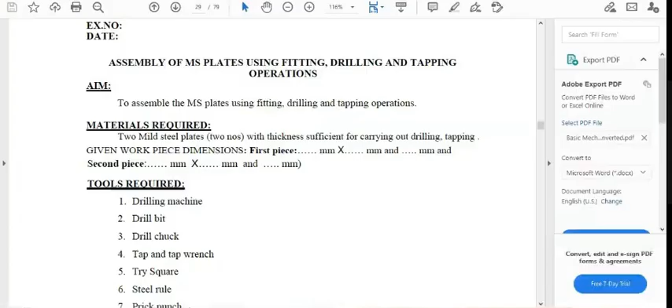Okay, so again the same thing. What are the materials required for it? Material is nothing but again you have to consider the mild steel. Dimension is whatever it may be, considering a square plate size or a rectangular plate size. I will give you the dimensions for drawing the thing in your record.

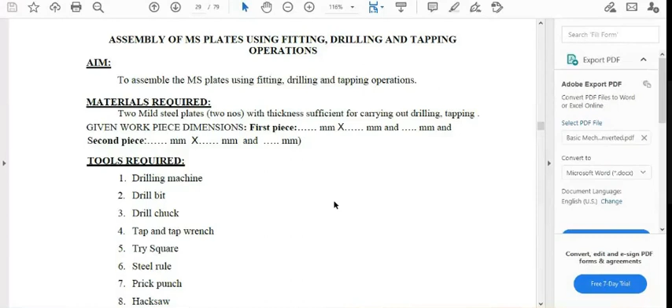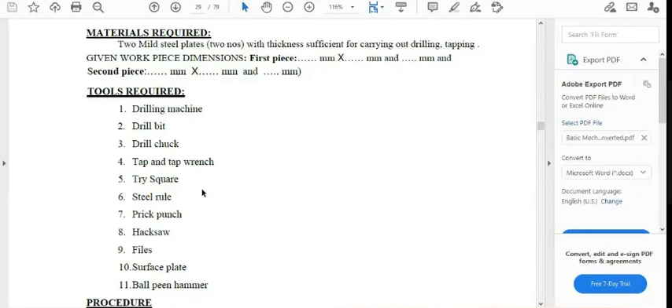And what are the tools? Since we are going to prepare a hole, definitely we need a drilling machine. For preparing a drill, we need a drill bit. Drill chuck is nothing but the holder, and a try square, steel rule, prick punch, hacksaw, files—all those things we already used in previous cases.

So just we will see how to prepare a hole and tapping in an MS plate. Just you can look at this video.

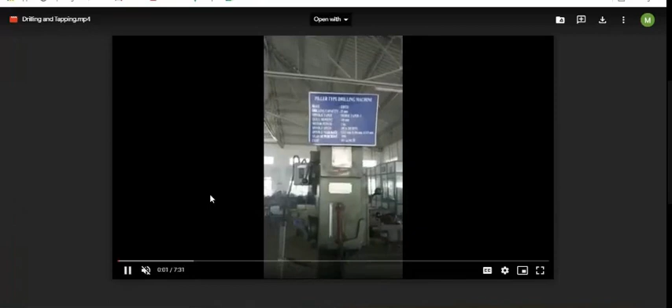Is the screen visible? Yes, sir. Okay, see, so this is the drilling machine.

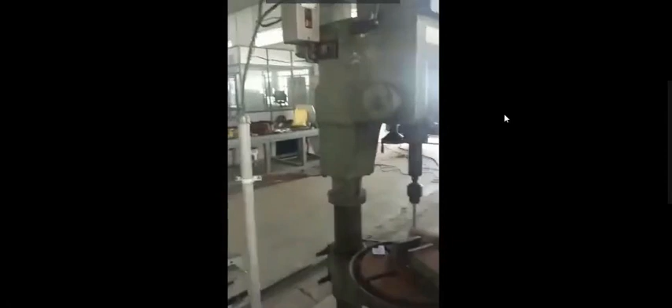This part we can say is a drill chuck. Drill chuck is nothing but where you hold the drill bit. So this is the drill bit. Is it clear? Just recognize where I am pointing the arrow. This is a drill bit. This is a drill chuck, where you can hold the drill bit.

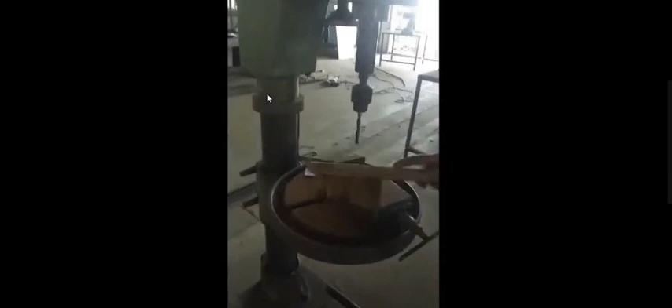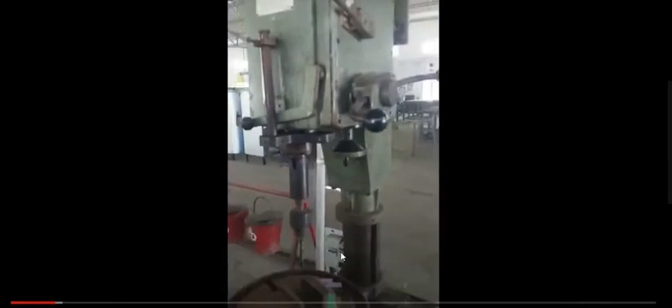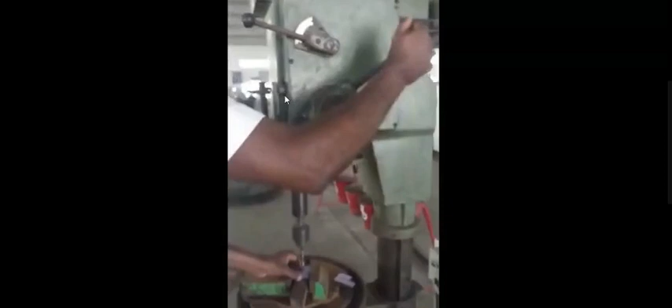This is a material holder where you can place the MS plate. This is a handle, you can apply force on it. After preparing a square plate, you can place it here for preparing a hole.

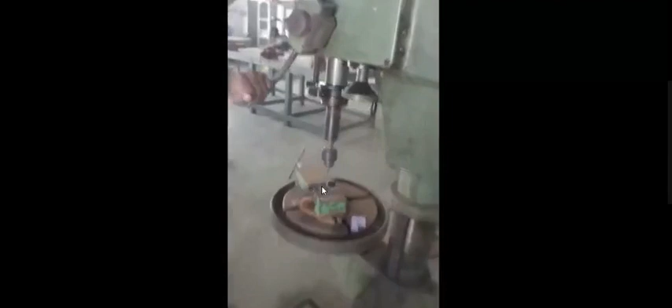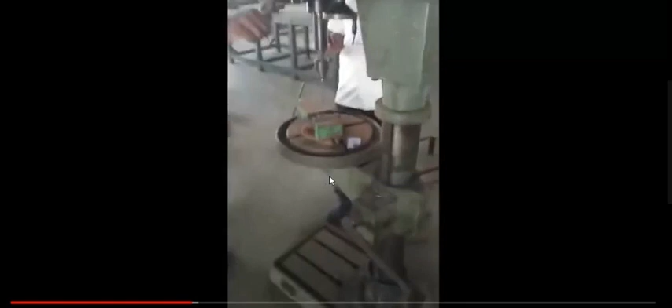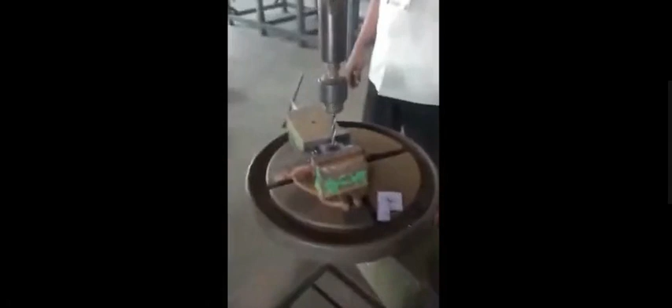So you can see, by adjusting this handle, we can force the drill bit to prepare how much amount of hole we need. See, the hole is prepared here. The size of the hole depends upon our application. You can select the size of the drill bit. We have a number of drill bit sizes, so depending upon our required hole size, we can select the drill bit.

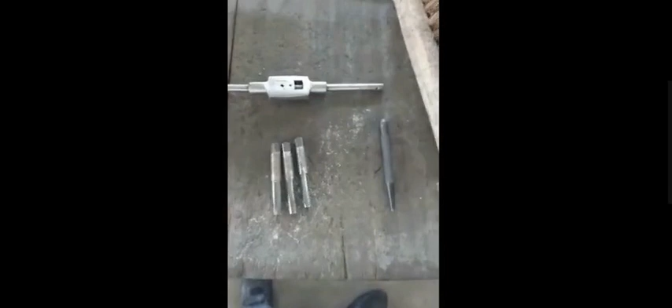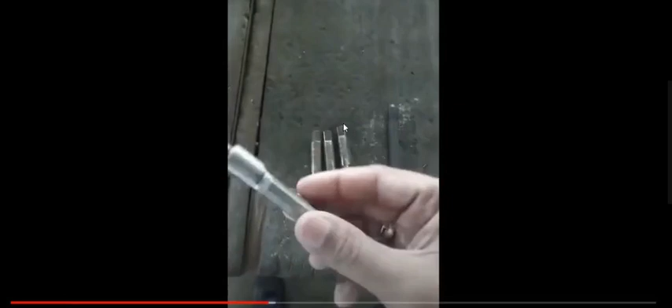After preparing a hole, you go for a tapping. So this is a tapping operation. See.

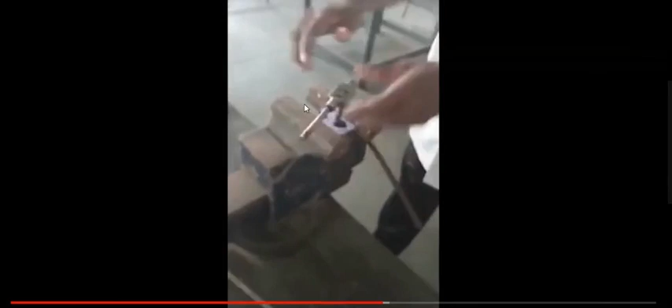See, just you can fix the MS plate in a bench vice. Already we prepared a hole by using the drilling machine. Suppose we want to enlarge the size of the hole, we can go for a tapping. So this is the tapping operation. Depending upon the necessity to increase the size of the hole, you can choose the tap bit also.

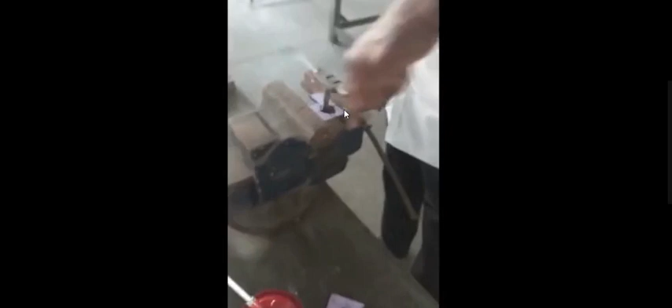So, to avoid the friction between the tap bit and the MS plate, if needed, you can go for lubrication. For that purpose, you are feeding oil, just to avoid the friction.

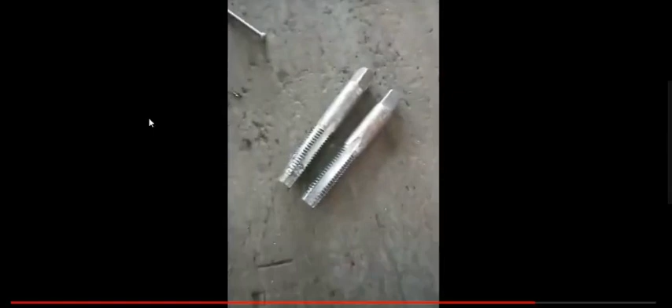Right. Again we want to enlarge the size, means again go for another tap bit, okay.

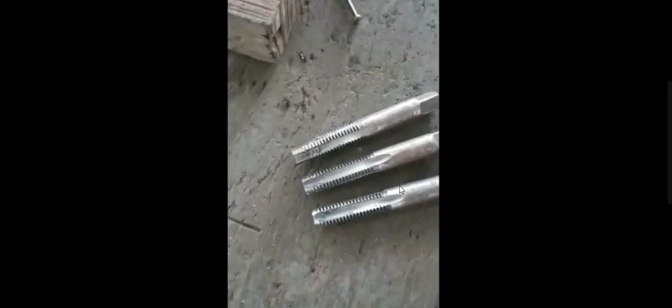Suppose we want to enlarge the size of M10, we can't directly move on to M10. So step by step you go for enlarging the size. Initially M6, then M8, like that. Step by step you enlarge the size, so finally you can obtain whatever required size of the hole, and you can fit it using bolt and nut, right?

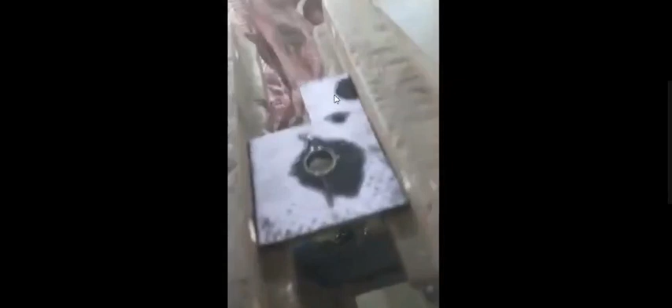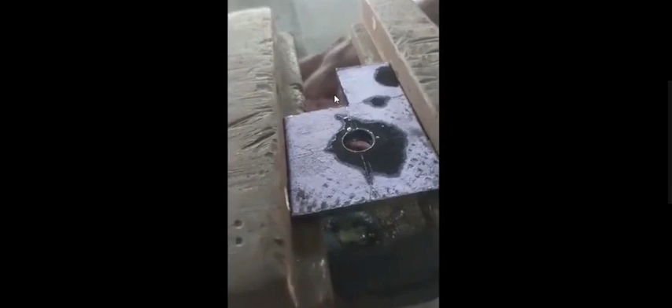I hope all of you are clear on the difference between drilling and tapping, and how to prepare those operations, right? Any doubt? Now, if you have any doubt, you can ask me. Understood?

Guys, no doubts. No doubt, sir. What about others?

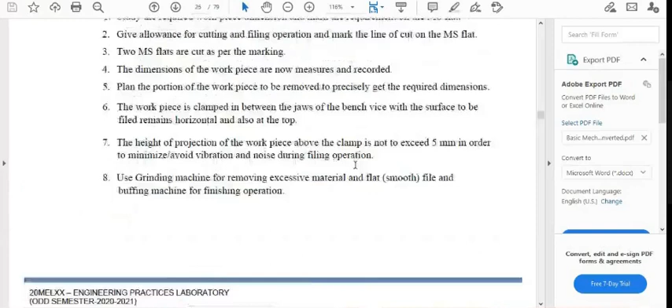See, let me tell you how to write a record. This is the first experiment: work piece preparation for fitting operation. All should follow the same procedure. You should put experiment number 1 and today's date. Same date, right, there's no change in that. All of you can follow the same date, 21/4/2021, for experiment 1 and experiment 2.

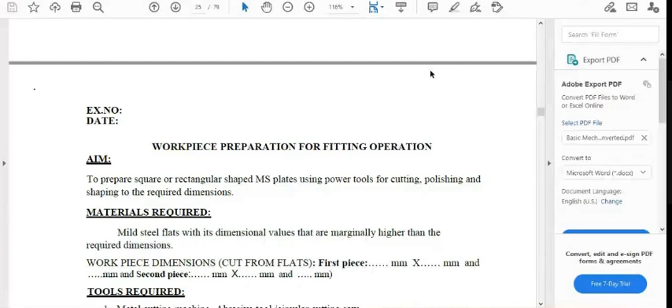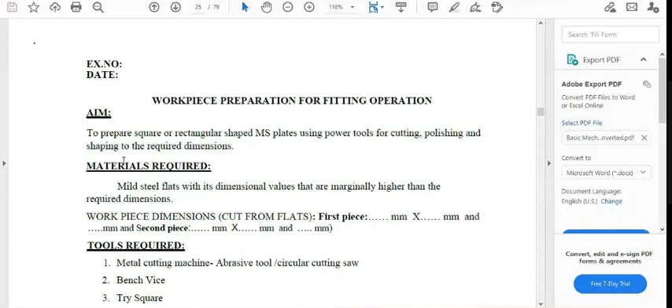Okay. And you can give a title, and write the aim, and what materials are required for it, whatever is given in our manual, you just copy the same. Okay. And for the dimensions, for example, all of you can take your roll number as a dimension.

For example, 150 is 150. Sir, you should consider the dimension for this experiment as 150. Not only for these experiments, but for all the experiments you are going to conduct in our mechanical part, you should follow the dimension as your roll number. Okay.

Yes sir, right. So how can you give a dimension for the first piece and second piece? For example, if you're considering a square plate, anybody? Based on our roll number, you can say the first piece dimension and second piece dimension.

So actually three parameters are given: the first one is length, breadth, and thickness. The thickness is common to all, please make a note of it. The thickness you can consider as 4 mm, right?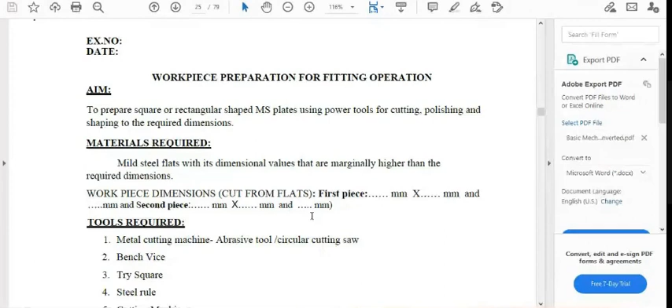Now, is it all clear? Length, breadth, thickness. The thickness is common for both first piece and second piece. Please all of you make a note, which is 4 mm.

Please, roll number 180. Sir, can you tell me your dimension for first piece and second piece? Sir, 180 mm into 180 mm and 4 mm for the first piece. Okay. What about the second piece? So the second piece is also the same, 180 mm into 180 mm and 4 mm.

Okay, good. So likewise, all should consider the dimension as your roll number. Only the thickness is common to all, which is 4 mm. Any doubt in this dimensions column? Any doubt?

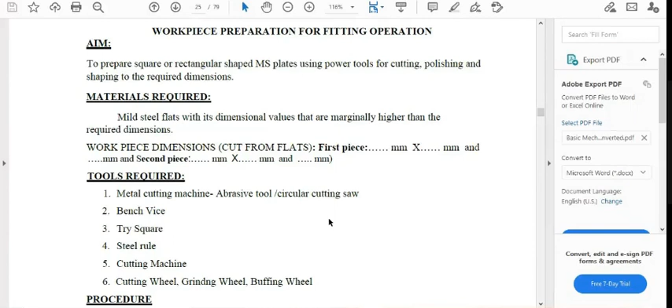Okay. And again, you should copy the same - what are the tools required for this experiment. And in the procedure, here around 13 to 14 points are given.

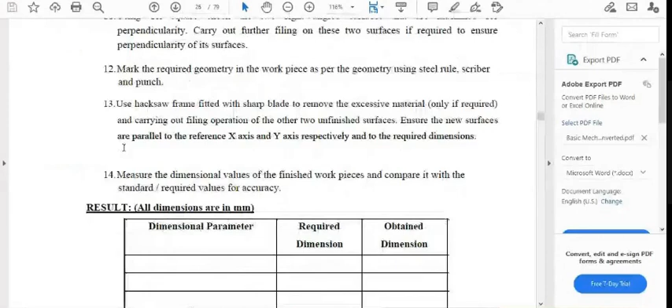Please don't copy this procedure from our manual - write it in your own words. Just give 4 to 5 points, which is enough. What are the steps needed to follow for preparing this workpiece? I expect only 4 to 5 points. Don't copy the same from the manual, I expect it all from your own, right? Okay, 4 to 5 points is enough.

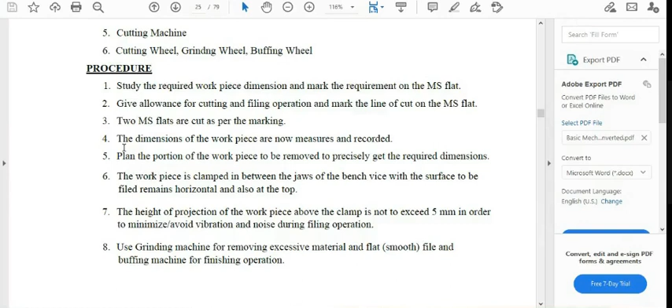What are the steps required to make a square plate? Okay, so please don't copy the procedure. If anyone copies it, I will simply mark it as zero.

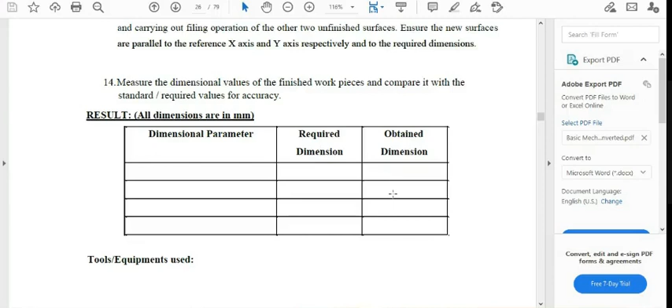And in the result column, again you can follow the same table. So in dimensional parameter, consider length, breadth, and thickness. Just enroll the required dimension. What is the length dimension? That means your roll number. Breadth is the same, and thickness is considered as 4 mm. This is the required dimension, and in the obtained dimension, write the same thing you enrolled in the required dimension.

Okay, let's come to the part of the diagram. Just plot the square plate, no need to go for a rectangular plate. All of you please plot the diagram for square dimensions. And for conclusion, give in a single line what is the conclusion for this experiment, which is also your own writing. The sample diagram for this is given in the last page of your manual.

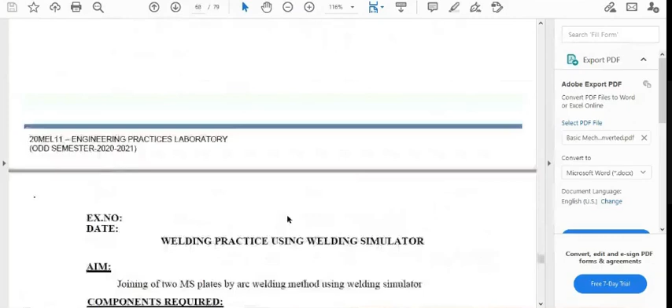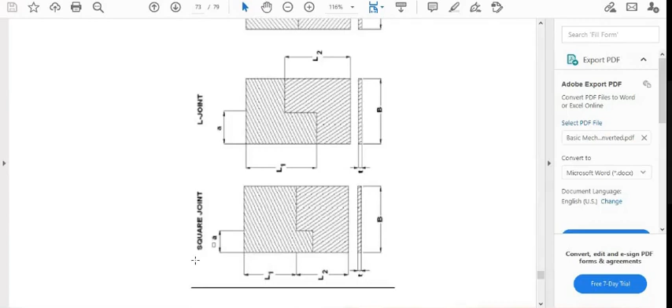Please move to the page number after this one. The various models are given: V joint, L joint, and square joint. I asked all of you to follow only the square joint. So please draw this diagram based on this one, but you should mention the dimension in the diagram, whatever dimension I gave you, as your roll number.

Okay, and you can use the scale ratio. What is scale ratio? I hope all of you use the scale ratio while plotting a graph, in maths, or in engineering drawing. I hope all of you are well known about the scale ratio. You should follow the scale ratio, so please write the scale ratio also: 1 centimeter equal to how much mm you are considering.

For example, if any roll number has 200, definitely they are not able to plot a 200 mm length. Just consider the scale ratio 1 centimeter equal to 10 mm, so you can simply plot 20 centimeters like that. Please follow the scale ratio, and while plotting the diagram you should follow the rules followed in engineering drawing. So based on the engineering drawing, please sketch your diagram.

Any doubt? How to write a record or how to plot the diagram? So this is length 1, length 2, this is thickness, this is breadth dimension, and again how much amount of material should be removed from the breadth, which all of you please consider as the midpoint.

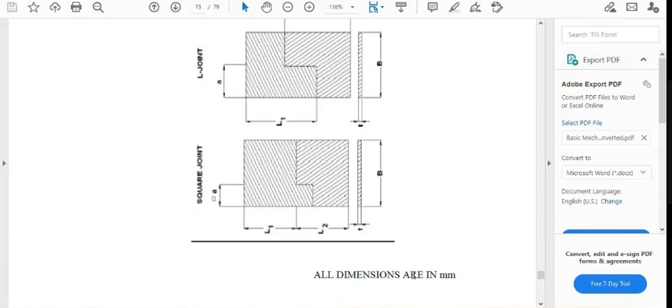Clear? Any doubt in plotting the diagrams for this experiment? No doubts. Anyone? Anybody? All of you clear? Say something. Anyone? Anna?

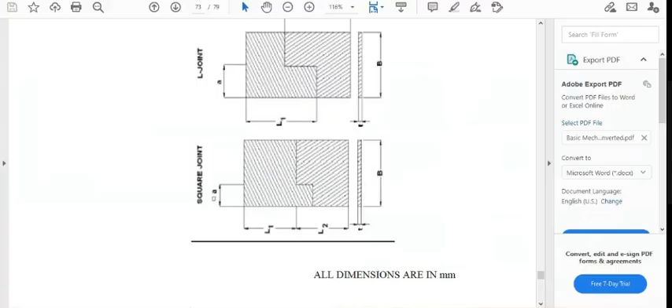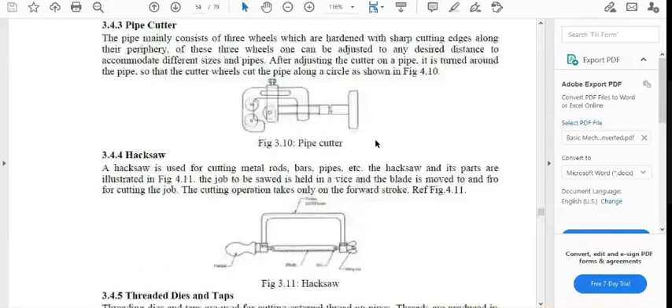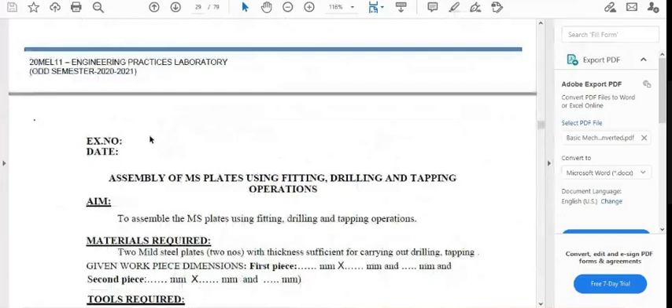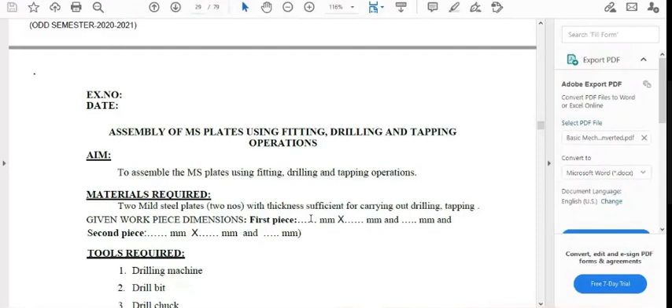So again the same thing for experiment 2. Put today's date and today's heading, aim, materials. Again you can follow your roll number as dimension for the first piece and second piece. Again the thickness is common for all, which is 4 mm. Just take down the tools required and don't copy the procedure.

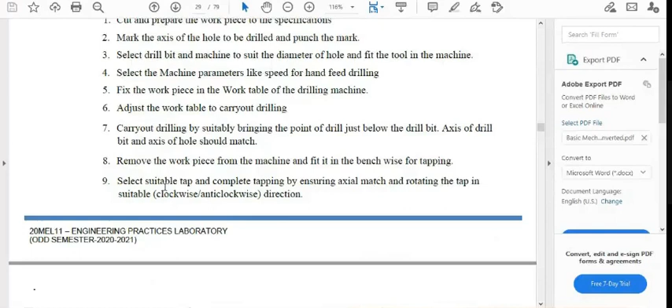Make your own, please put the results here. What are the dimension parameters required for it? And finally, you can plot the diagram. So the diagram, whatever we plotted for the previous thing, again you can consider the same thing. In addition to that, just show a hole.